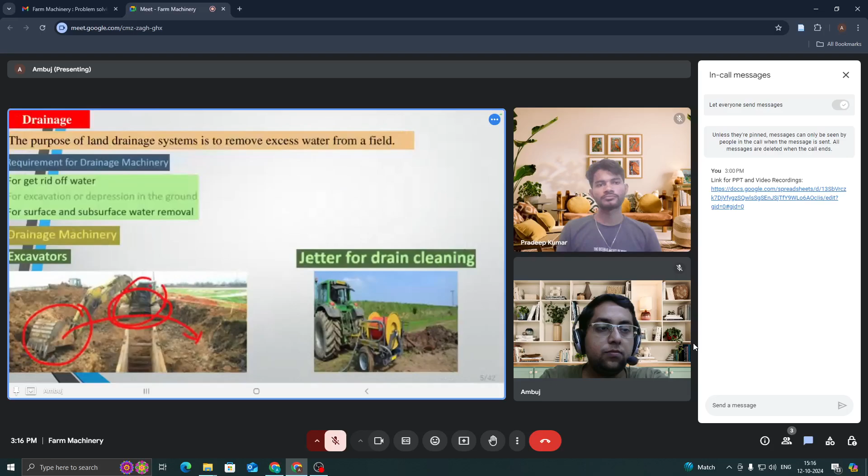In order to let go of that excess volume of water, we create a proper drainage system in our field. Then you have this particular suction jetter for drain cleaning, as well as the excavator, or in our general language we call it JCB, used for digging the drainage pipelines, digging holes for drainage pipelines. As well as mole plow is there, that is used for creating drainage pipeline holes. Mole plow, as I already told you, please do remember it.

The most important thing to remember regarding mole plow is this: mole range or diameter is 50 to 100 mm, and installation depth is 300 to 600 mm. Here on the right hand side picture you can see a plow is there.

It is attached directly to a tractor, and at this particular end you would be able to see it. It is directly dragged into the soil in order to create a cylindrical hole across the entire field. This particular mole plow is used to lay down cables as well as pipes for drainage - might be very useful for cable hole laying, otherwise for drainage pipe laying. Both purposes are there.

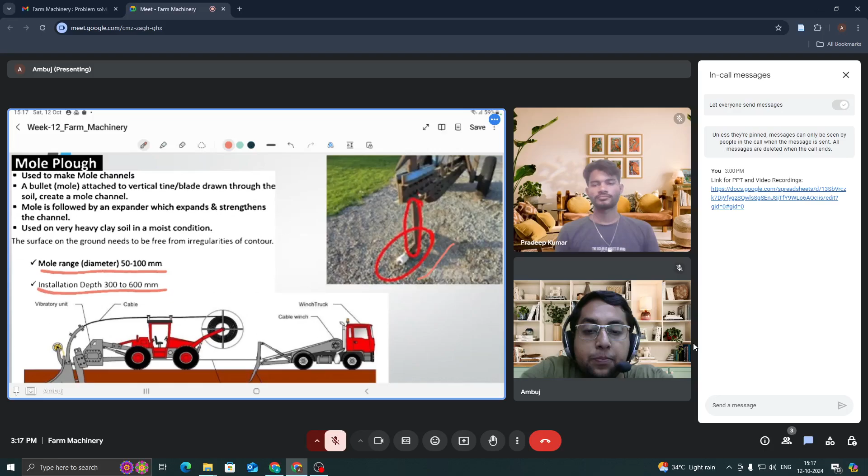The diameter and depth you can remember. Used to make mole channels - a bullet mole attached to a vertical tine or blade drawn through the soil creates a mole channel, and the mole is followed by an expander which expands and strengthens the channel. At the front end you can see a small expander, at the back end expander is there. At the front end, the first cut into the soil would be made, so a sharp edge is there.

And yes, it is used for very heavy clay soil in a moist condition. Yes, it can be used for that.

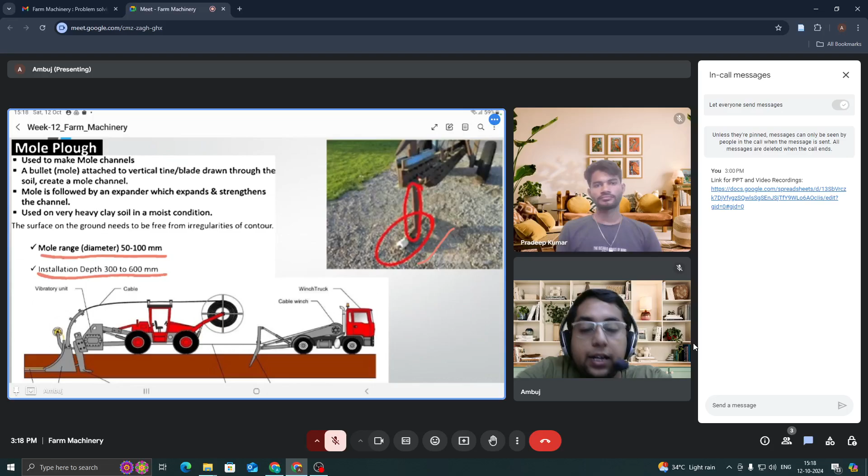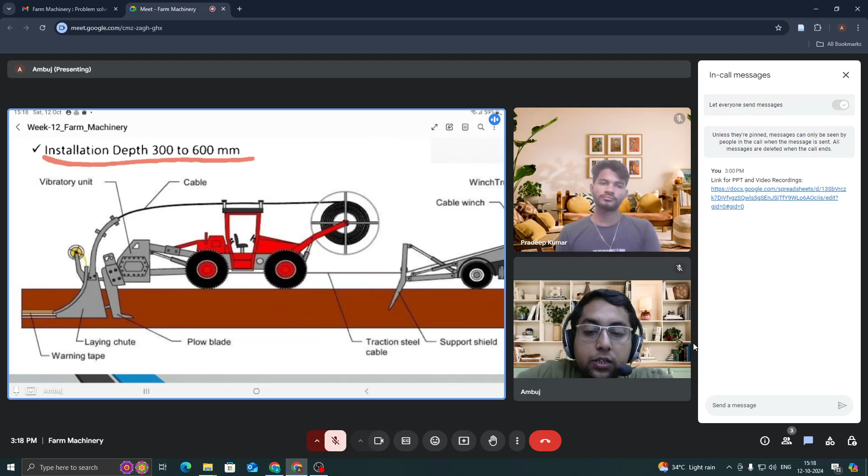The entire process I have deliberately made this particular flow chart, this particular diagram, showing how the cable laying process is done through the mole plow. A plow blade is there, at the bottom corner you can see. Then laying chute is there. Then warning tape, wrapping tape is there. Then vibratory unit is there, and the line is also getting carried along with the tractor.

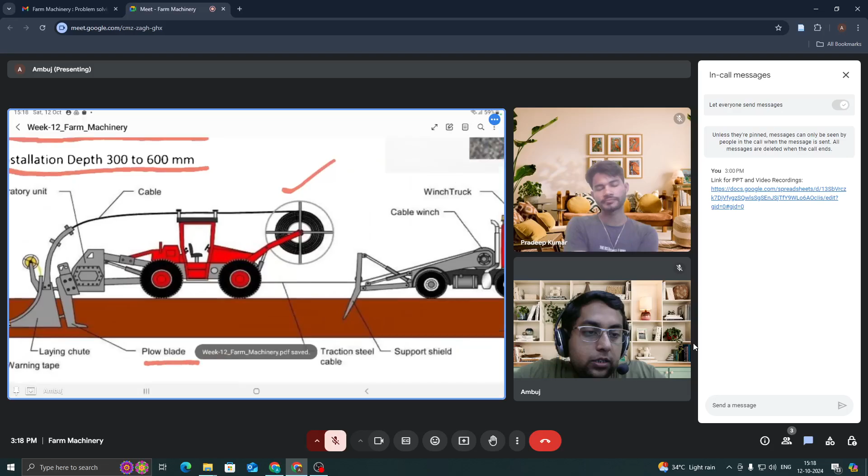Yes, this is very important for cable laying. Then the other part of the lecture.

That deals with depreciation methods. In the previous week's content, depreciation methods have also been dealt with. Depreciation of agricultural machinery refers to the gradual decrease in the value of agricultural equipment and machinery over time due to wear, tear, obsolescence, or other factors. As time passes by, the cost on which you bought a particular machinery, you won't be able to sell it on the same cost - that is the depreciation method, that is the meaning of depreciation in simple words.

In the context of accounting and finance, depreciation is an accounting method used to allocate the cost of a tangible asset - tangible means which can be touched, such as agricultural machinery, over its useful life. The various methods are straight line method, declining balance method, sum of years digit method, sinking fund method. Of all these methods, the straight line method is the simplest one.

The cost: initial cost minus the salvage value, divided by the total number of years. Salvage value is the value at which the particular implement is sold - that is the amount by which the cost, that is initial cost, gets decreased every year. That is the meaning of salvage value. So straight line method is the easiest one.

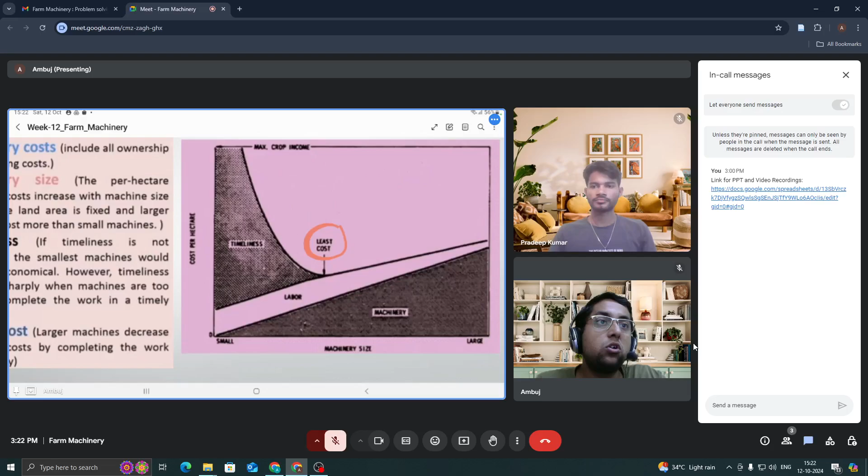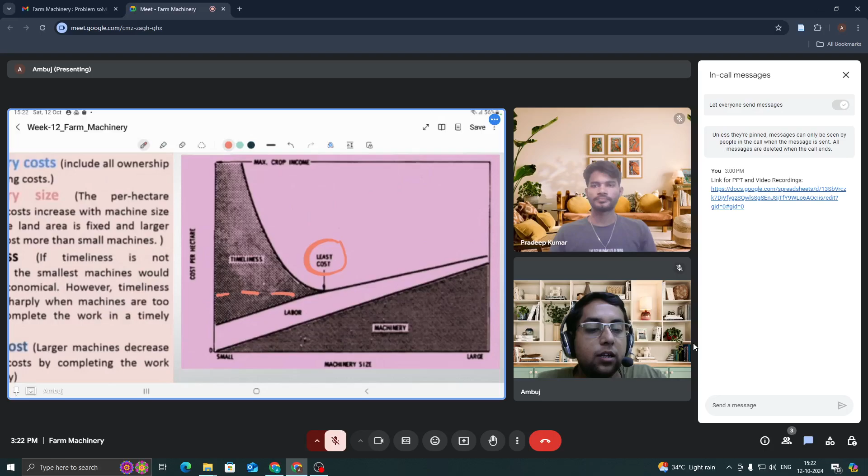For example, see here cost per hectare - it has been plotted on the right hand side. Machinery size has been plotted on the x-axis, cost per hectare has been plotted on the y-axis. Then you can see the labor rate has also been plotted, as well as the maximum crop income. So every variation has been plotted, and then we are looking for the least cost or the feasible zone. Wherever that point would be there, we will follow across all the parameters - machinery size, labor requirement, as well as timeliness or cost per hectare. Every parameter we will see according to this particular value only. This is the meaning here.

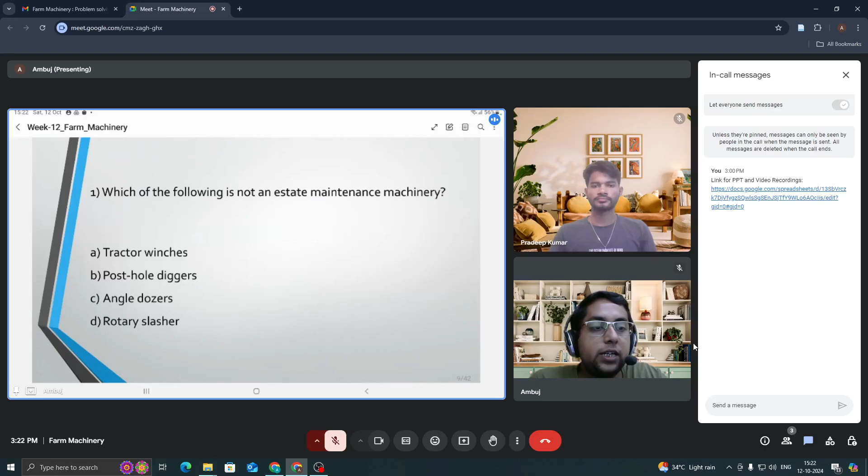Okay, let us move forward. If you are careful, then you can very easily answer. Do try to answer it, no problem, even if you are incorrect. Which of the following is not an estate maintenance machinery? Tractor winch, post hole digger, angle dozer, or rotary slasher.

Do try to answer it. If you are careful, then in the very first slide I have told you this. I think A, tractor winches will be the correct answer. Okay, you are saying option A, tractor winches.

Okay, I'll just write it down. No, it is not there. Okay, you missed it, no problem.

See here, all of these, tractor winches, post hole diggers, and rotary slasher are estate maintenance machinery only, but angle dozer is a land reclamation machinery. See here, no problem. Maybe you are not able to visualize in the very first thing, but after the class please revisit all the things, every question as well as the PPT. It will be very useful for you in the examination.

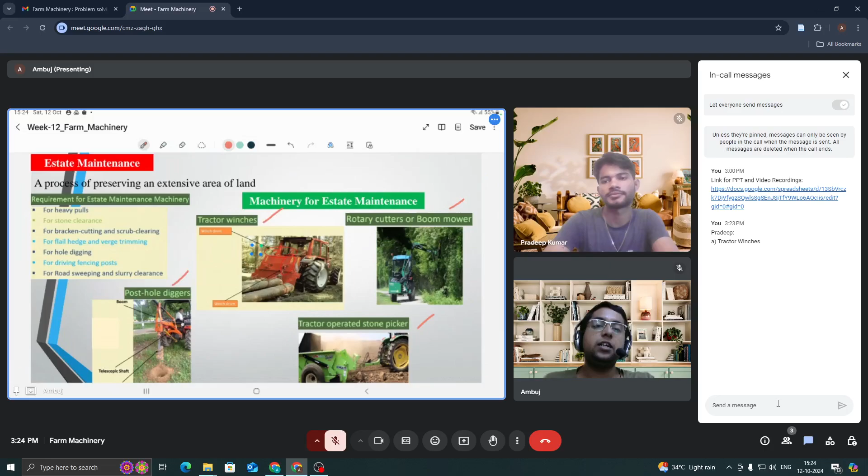See here, maintenance machinery are tractor winches, then your rotary cutter or boom mower, tractor operated stone picker is there, as well as post hole diggers are there. These are the estate maintenance machinery. Means after the land reclamation process, you just have to maintain that particular land.

For that particular purpose, you have to use those estate maintenance machinery. And your land reclamation machinery are these ones: bulldozer, angle dozer, then tractor operated loader, then your laser land leveler, and as well as your tractor mounted scraper. These are your land reclamation machinery, direct from the PPT. No if and but is there.

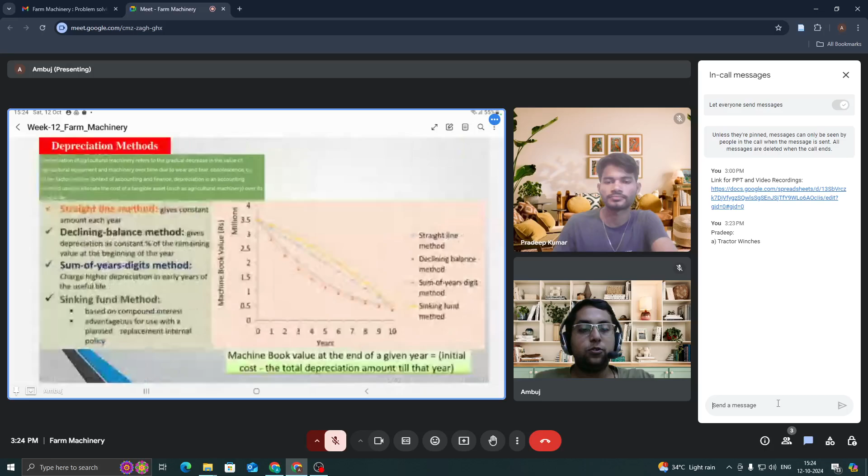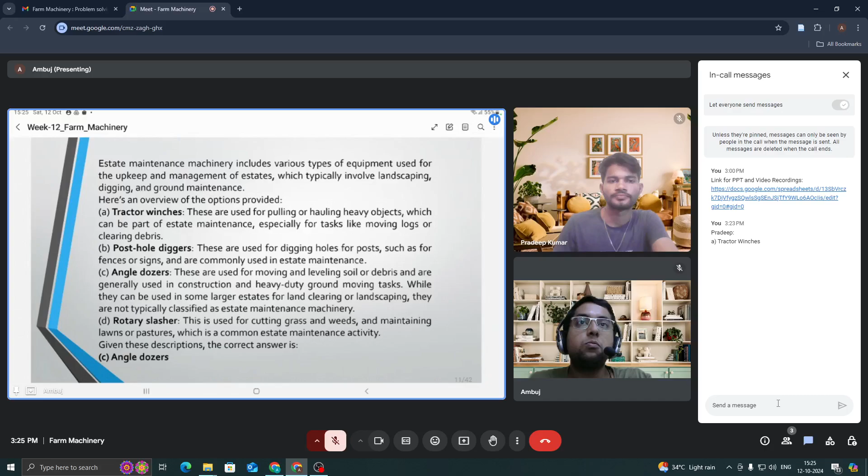Estate maintenance machinery include various types of equipment which are used to keep upkeep and management of the estate, which typically involves landscaping, digging, and ground maintenance. Overview of the options provided: tractor winches, yes, they are used for pulling or hauling heavy objects, which can be part of estate maintenance machinery. Then your post hole diggers, yes, they are used for digging holes for the posts, such as fences or signs, as well as for planting trees.

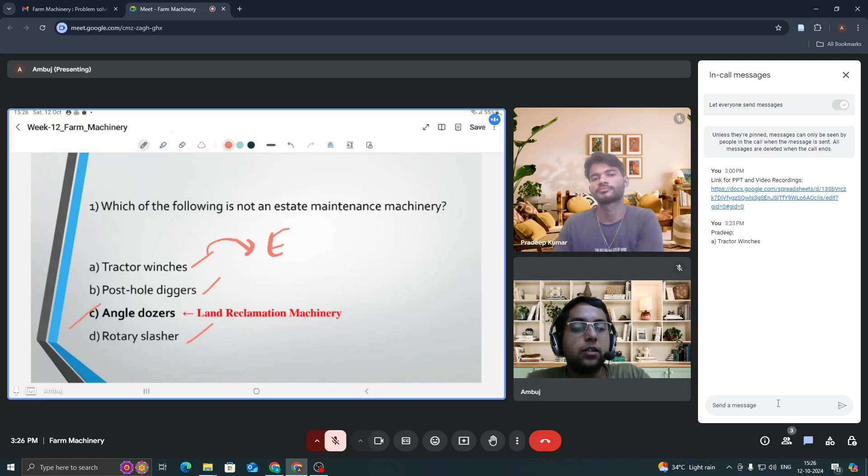I already told you, they are commonly used in estate maintenance. But our angle dozers, they are used for moving or leveling the soil or debris, and are generally used for construction and heavy duty ground moving tasks. They can be used in some larger estates for land clearing or landscaping, but they are not typically classified as estate maintenance machinery. Rotary slasher is there, it is used for cutting grass and weeds and maintaining lawns and pastures. Already told you, already showed you the picture also. Common estate maintenance machinery, and the correct option would be this one only. These all are estate maintenance machinery.

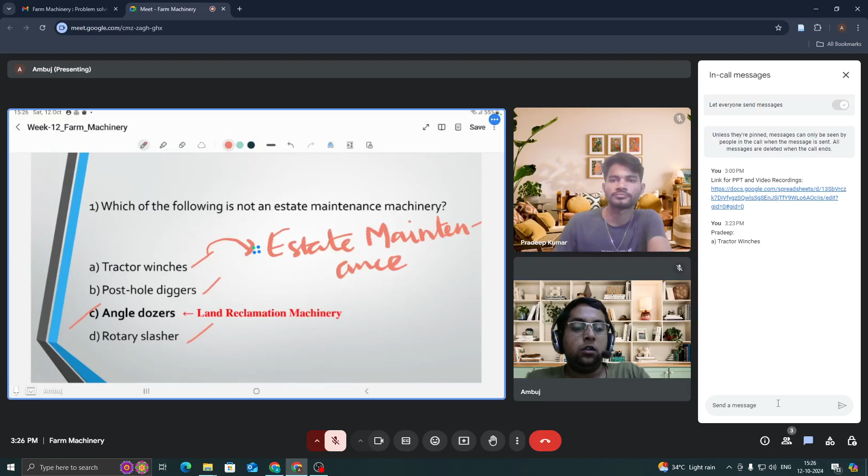Okay, but your C part, angle dozer is land reclamation machinery.

Yes, moving forward. Which machinery is used for leveling the field within a certain degree of desired slope? Is it your tractor mounted scraper? Is it used, or it is tractor operated land planer? Or is it land leveler, laser land leveler? Or is it angle dozer? Do answer it.

I think option C, laser land leveler. Okay, I'll just type in. No problem, yes, you are absolutely correct. It is indeed laser land leveler.

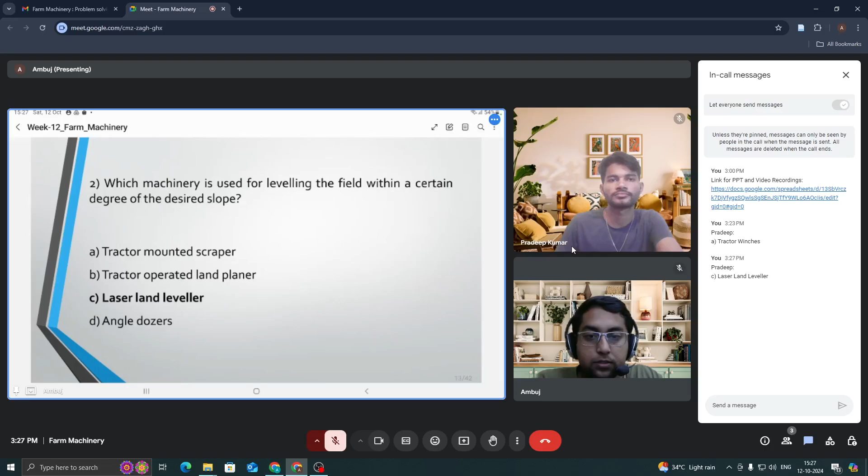Because here a particular keyword is there: certain degree of desired slope. Had it been removed from the question, then a lot of options can be used, like tractor operated land planer, scraper. These all are used for planing or leveling only. But here it is written that within a certain degree of slope or within a certain range, you have to maintain the slope of the entire field. Then you always have to go for laser land leveler, because that precision can be only set in your leveler.

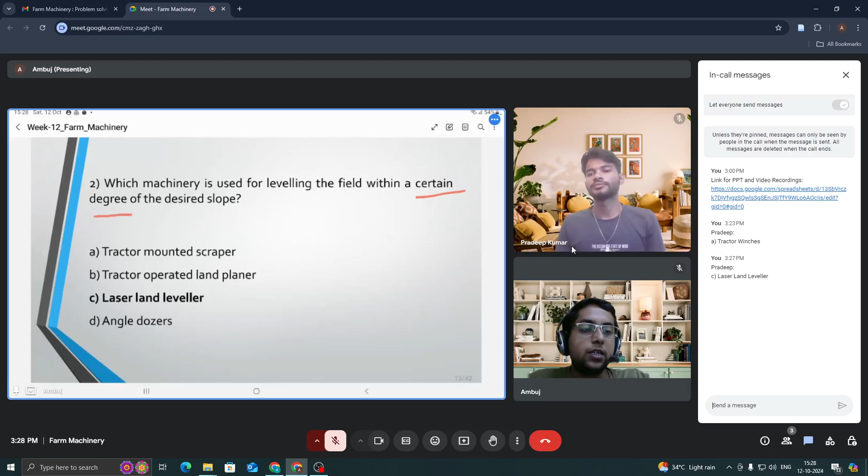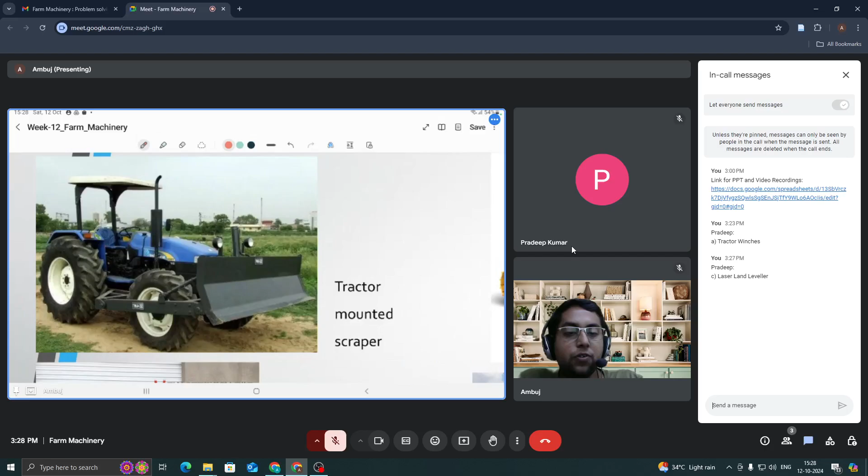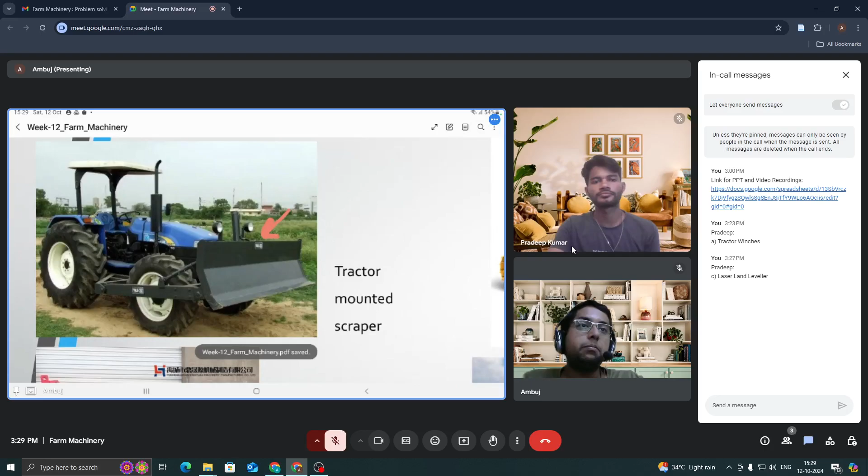Yes, this whole, every instrument's picture, every equipment picture is there. Tractor mounted scraper, here you can see how is it looking. Means a scraper is attached at the front end, and it would be either fully mechanically operated, or it may be hydraulically operated for lowering and uplifting of the scraper bucket.

This is important. Then angle dozer, I already told you how it looks, and what is the purpose. It is a caterpillar track based machinery, entirely used for scraping only. But the precision in both of these is rough only, based on the operator's judgment. He would be able to level the field within a certain degree or within a certain range, not up to degrees.

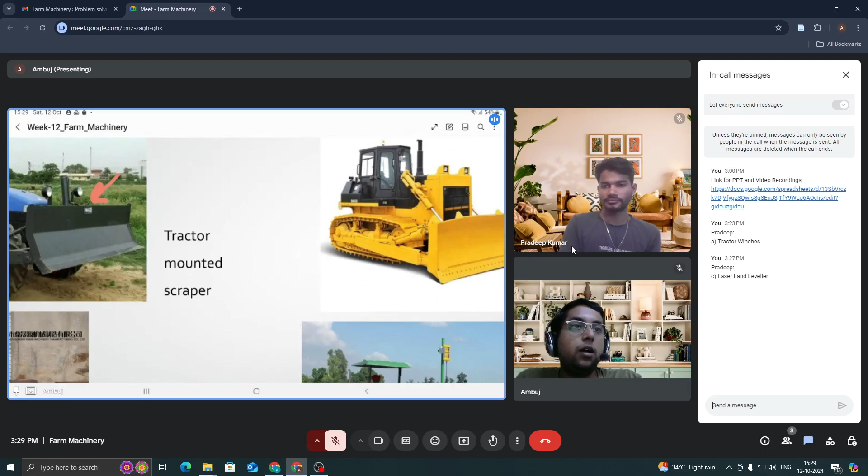Then tractor operated land planer scraper is there. These tractor mounted scrapers mean mounting is done at the front end. But tractor operated land planer or scraper means it would be attached to the lower 3-point hitch linkage system of the tractor, and it can be dragged along. So in this particular case, the judgment of the elevation would be somewhat difficult to make.

But in case of tractor mounted scraper, since the operator would be able to see what amount of soil is moving in front, the judgment of the elevation of the soil he would be able to make to much higher precision.

Then in this figure, laser land leveler is there. Both the laser transmitter and laser receiver are shown in this picture - this particular one is the receiver, this one is the transmitter. As well as the bucket is there, having a hydraulic cylinder. You have to connect this through the hydraulic system of the tractor so that the bucket of the laser leveler can be automatically lowered or uplifted.

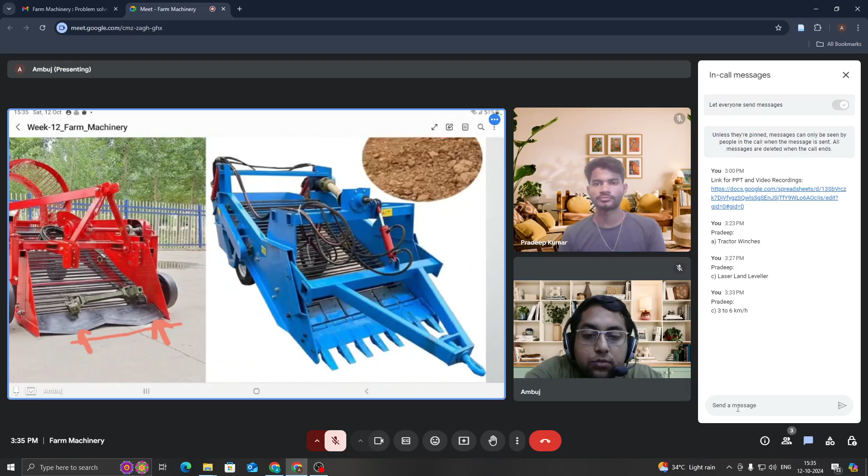Similar picture is there on the right hand side. Here you can see another system has been made. The shape of the stone picker is only different, but the rest is the same here.

The conveyor is there, and it is hydraulically operated, lowering down and up. Uplifting of the entire system takes place through the hydraulic system, and it also requires PTO power for this particular conveyor mechanism movement.

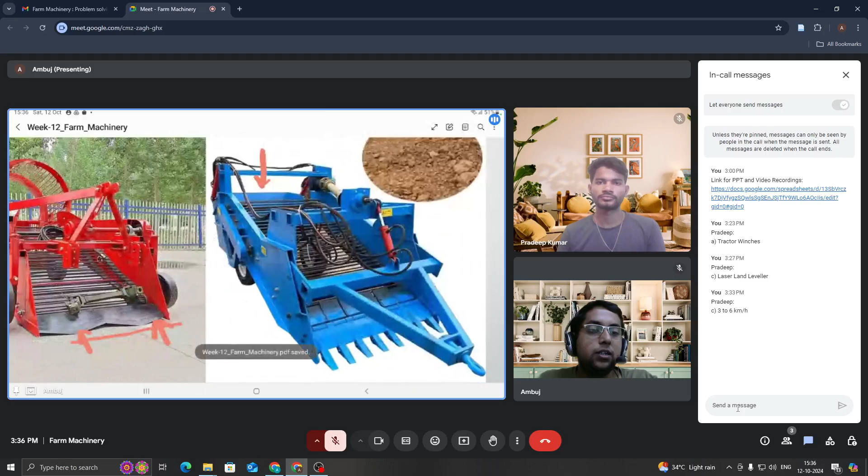At this particular place, your stones would be deposited, and that you can empty down after the operation is completed, at a place away from your field.

Speed of the tractor operated stone picker in field operation falls in the range of 3 to 6 kilometers per hour, because stone pickers are designed to collect stones from the ground surface while minimizing soil disturbance. If the working speed is 10 to 15 kilometers per hour, it would be too fast and inefficient; the machine might miss stones or cause breakage.

At 1 to 2 kilometers per hour, it is a bit slow, and there are chances that excessive load would be there on the entire machine system.

1 to 2 kilometers per hour would be appropriate if primary tillage is being carried out in the field, and 7 to 9 kilometers per hour is too much on the higher side. Hence, the typical speed for tractor operated stone picker machinery would be in the range of 3 to 6 kilometers per hour.

Generally, in field operations carried out by the tractor, the speed ranges between 1 kilometer per hour to 5 kilometers per hour. This is the conventional speed.

Let's move into the next question. Easy question: to construct a 4 kilometer long drain, two excavators were employed. Working rate of an excavator is 15 meters per hour, 8 hours per day, and work efficiency is 75%. Then the number of working days required for two excavators is 16 days, 19 days, 22 days, or 25 days. Do try to calculate it. It's a very easy question.

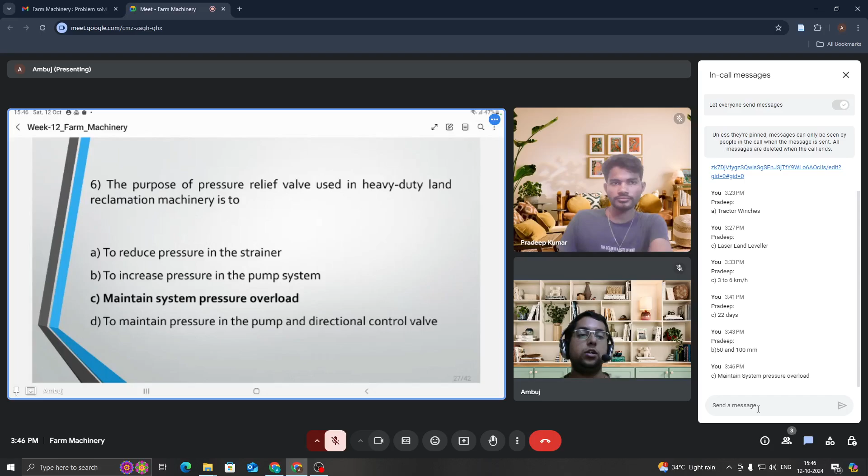The purpose of the pressure relief valve in every hydraulic system is the same only: it is to maintain the system pressure overload. As the pressure in the hydraulic system increases up to a certain value, the valve will open and the fluid flow will be directed into the sump, or the source of the hydraulic oil. For that particular purpose, a pressure relief valve is provided. Hydraulic systems in heavy machinery operate under specific pressure ranges for optimal performance. The pressure relief valve plays a vital role in maintaining this pressure by preventing overload. When pressure builds beyond a certain limit due to factors like pump output or system resistance, the pressure relief valve opens, bypassing excess fluid. This allows excess fluid to bypass the valve, preventing further pressure increase and protecting components from damage caused by excessive force. By regulating pressure, the valve maintains the system within its safe and efficient operating range. These are all the functions of the pressure relief valve.

Here is how the other options compare. To reduce pressure in the strainer - no, this is particularly not true. If you have to reduce the pressure in the strainer, you have to go for a reduction in the hydraulic motor's pressure. When you decrease that, only then would the system pressure be decreased, and the pressure in the strainer can be reduced. To increase pressure in the pump system - that is also done by the system variables only, not the function of the pressure relief valve. To maintain pressure in the pump and directional control valve - this focuses on specific components, and the PRV, pressure relief valve, is not directly related to it.

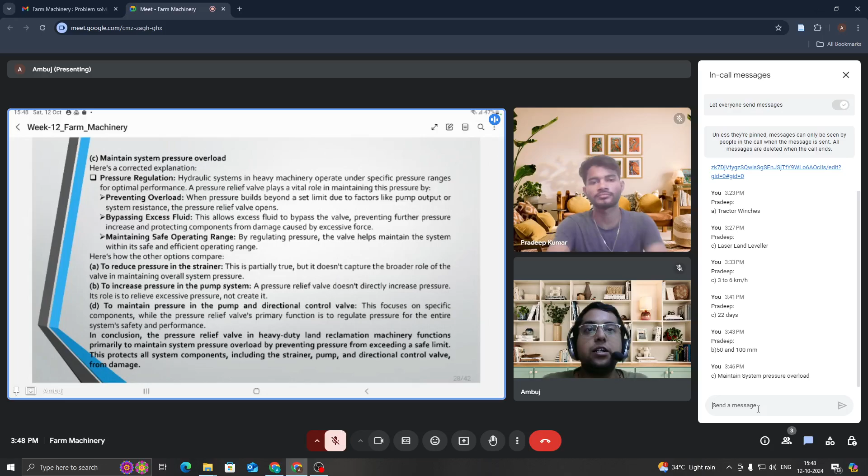Moving to the next question. In the declining balance depreciation method, the machine book value reduces each year - by a constant amount, by a constant percentage of the remaining value, or based on compound interest, or by 50% of the current value. If you are careful enough, I already told you, try to answer it.

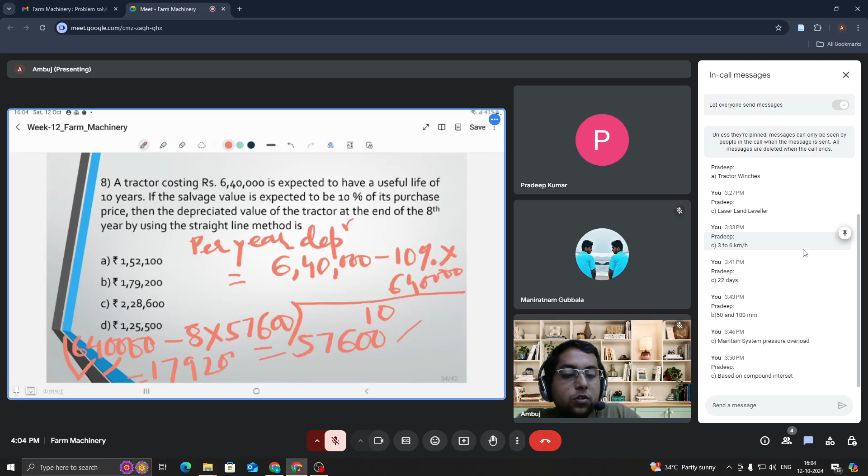Is the depreciation per year. Now it is asking at the end of 8th year, what would be the price? Initial price was 6,40,000. Minus it is getting depreciated by this particular amount, 57,600 per year. So 8 multiplied by 57,600, this would be the cost at the end of the 8th year. And I think it is coming 179,200. Just check. Yes sir, same answer.

So I think you missed it by just one zero only. So B would be the correct option.

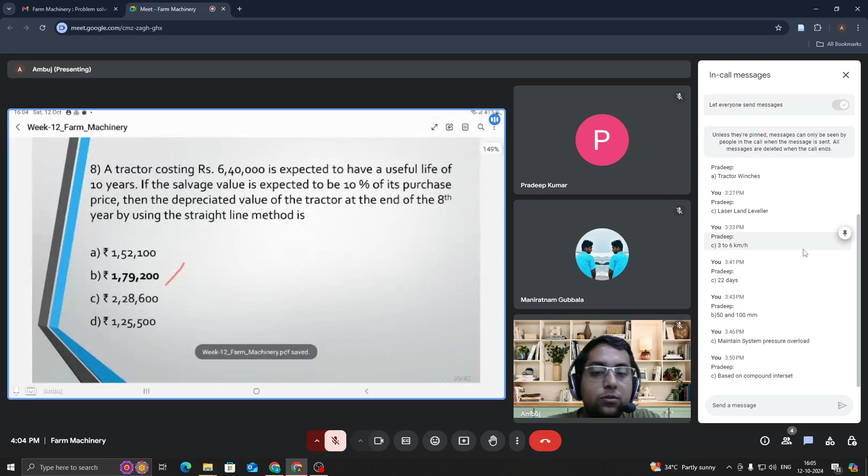179,200. Okay, this is how we will solve this particular question through the straight line method. And I sincerely advise you to solve it using these two methods also.

Declining balance method, already told you the depreciation expense will only vary by 2 into 1 upon useful life, that is 1 by 10, or book value at the beginning of the year, that is 6,40,000. This depreciation expense per year will only change, but the calculation method which I did in the next step, that is 6,40,000 minus 8 into that particular value, 57,600, that will remain same. So using the declining balance method also, you just try to solve this particular question, as well as through the sum of years digit method also you can solve it.

Yes, moving forward, this is the correct approach. Cost of the tractor or the machinery, minus salvage value, divided by the useful life, that is the annual depreciation. Cost of tractor has been given to you, salvage value you have to calculate as 10% of that. Useful life has been provided to you as 10 years.